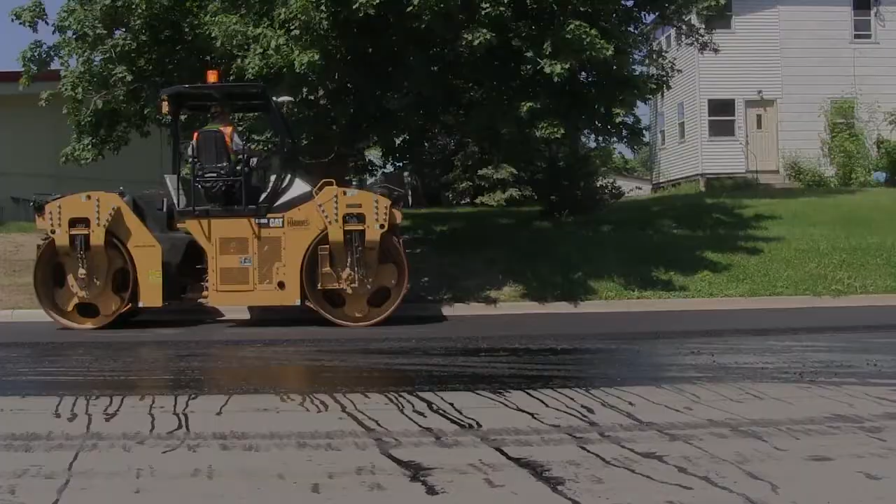One of the exciting systems we introduced within the last couple of years is our auto-adjustable compaction system. We call it AAC for short. This is an industry-first system that has intelligent compaction systems on each drum. So each drum is equipped with an ECM and an accelerometer.

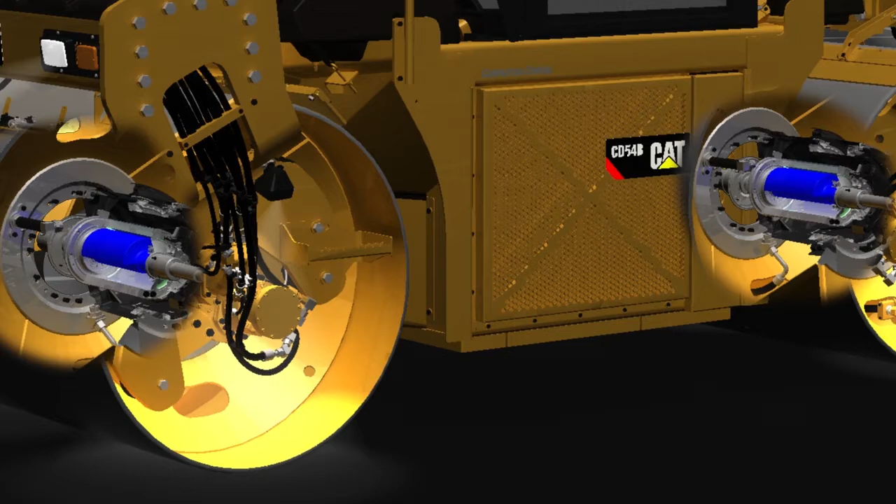The accelerometer, when the vibration is created, is actually measuring the feedback. With the measurement of the feedback, it makes adjustments in the amplitude. This is something that takes the setup of the machine away from the operator and automates the whole process. This will drive superior compaction and the quickest compaction.

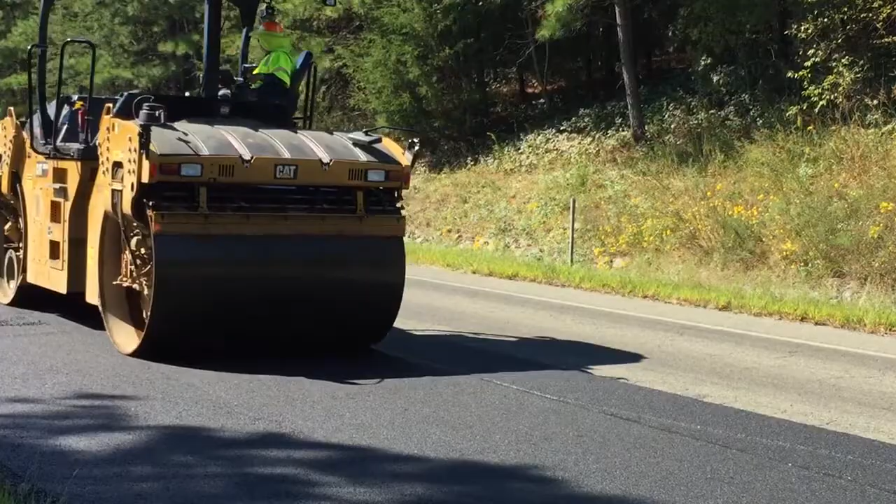One of the things that we're really excited about is our industry-leading reaction time. Some of the others that have systems like this only have it on one drum, but also the reaction time is significantly more. Ours reacts from minimum amplitude to full amplitude in as little as 4 seconds.

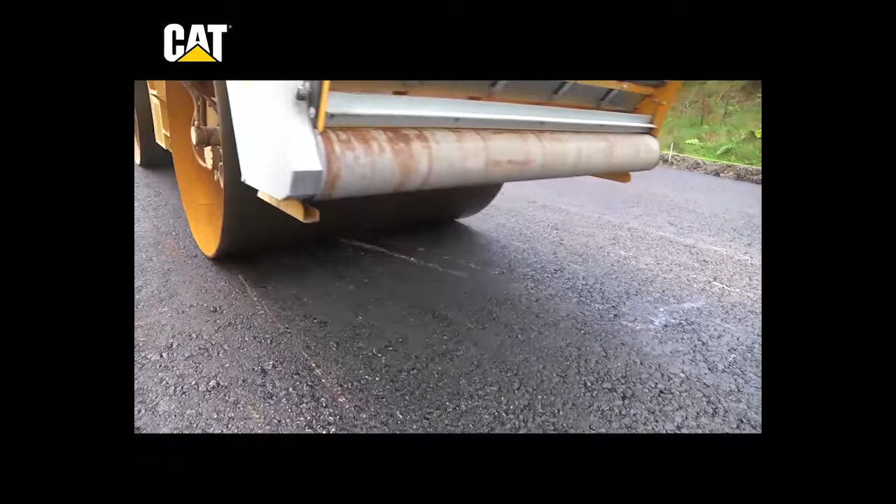So a quick video here. One of the things I'm going to point out right away is just a couple of things in our compaction control suite. Integrated temperature to pass mapping. This is an option conveniently located on the operator's left hand.

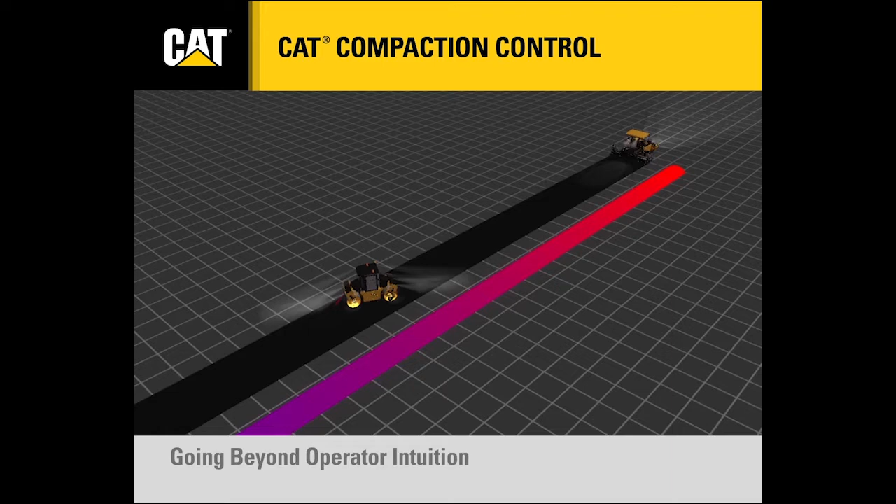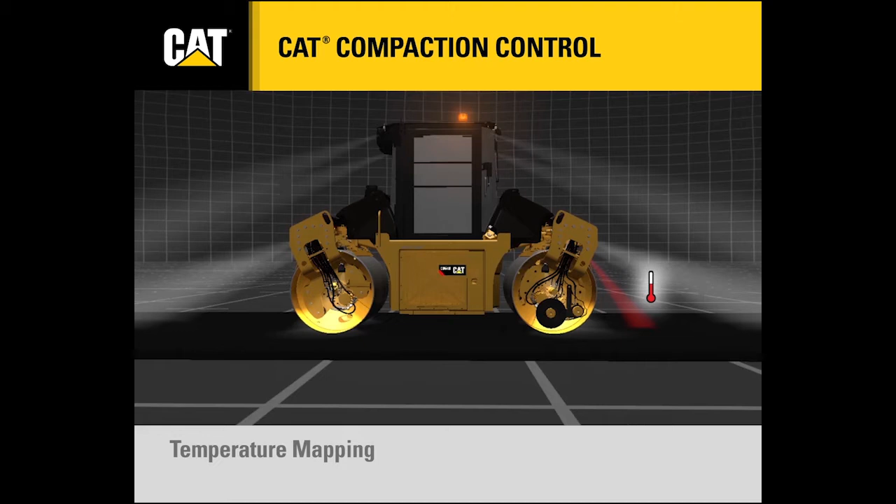So a quick animation showing the compaction process, rolling patterns. Starts with temperature. This is an option on our machine, so an infrared temp sensor in the front and rear of the machine. Now when we look at the auto-adjusting system, here's where you have the continuous processing of information, making calculations, all automatic on the machine.

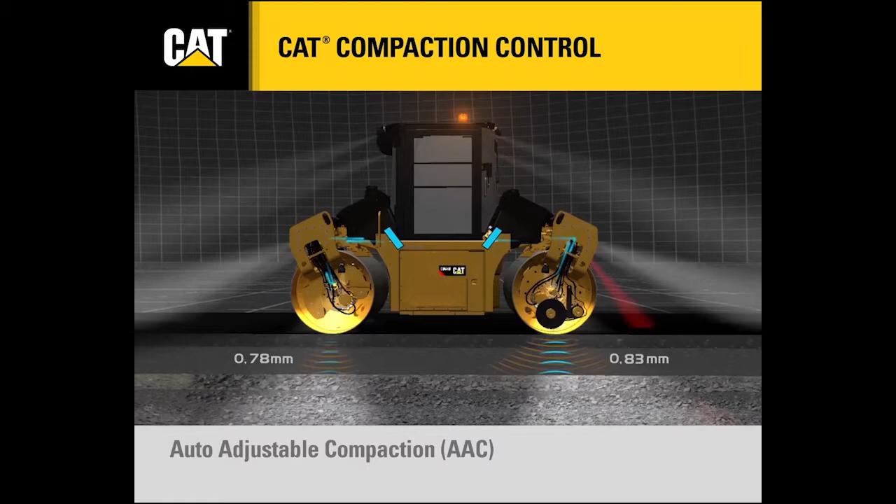The machine's automatically making calculations and it makes adjustments in the weights that actually change the amplitude. The amplitude is effectively the compaction energy that goes into the ground. Here you can see a couple of different values, so they're independently controlled.

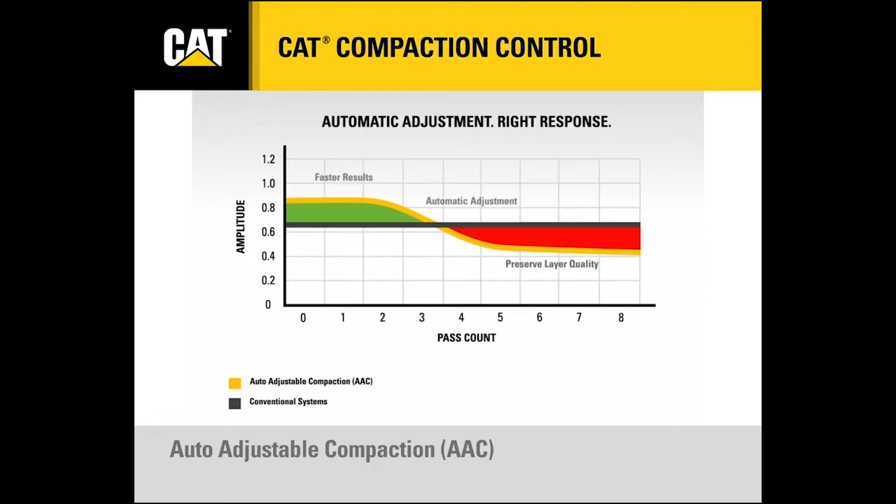Because this system has more amplitude than conventional systems, you can see that the compaction potential in initial passes is much greater. So you have faster results in the front side. Through the automatic adjustment, it eliminates the over-compaction, which preserves the quality of the compaction. So the durability of the asphalt layer is maintained.

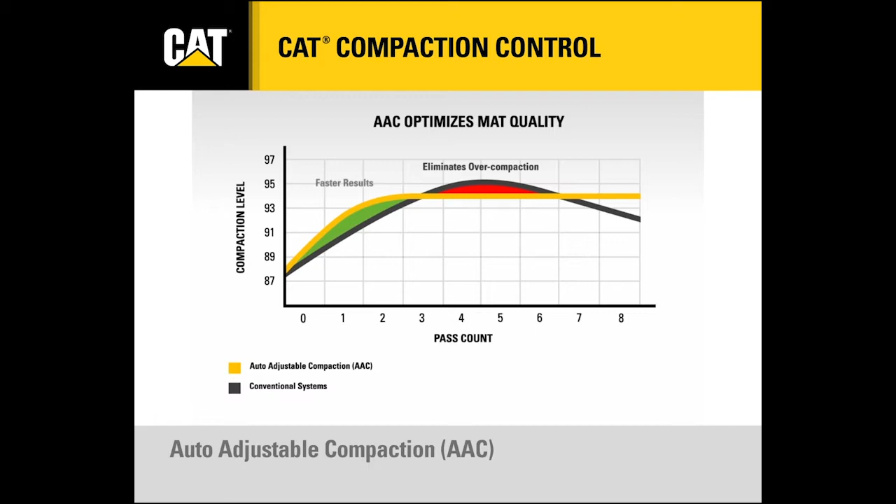When we look at this through a compaction curve, you can see the same information. Conventional systems with flat line settings will actually go through a process of over-compacting, which affects the durability, where this system automatically regulates through that process and preserves the asphalt layer.

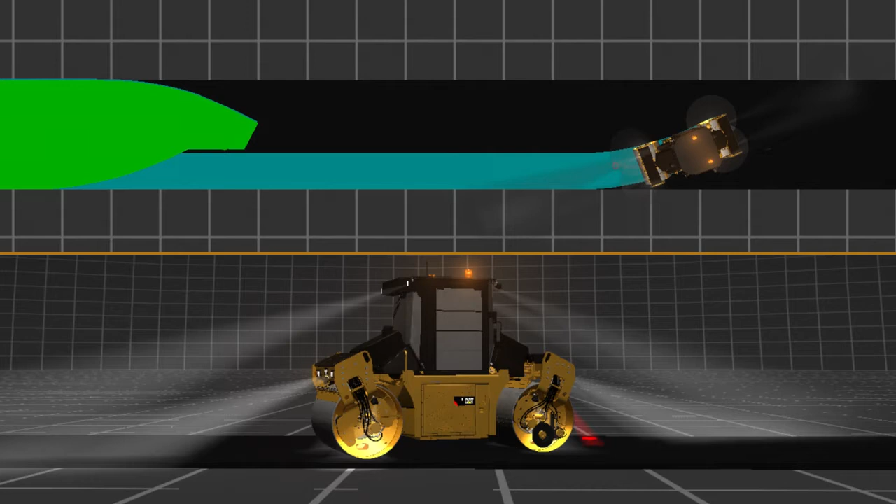Now a quick look at pass mapping. You know, one might think this is really a simple operation. This roller is making a rolling pattern. You can see here, because we created this animation, it's really evident that these kind of things can happen, but on a job site, oftentimes performed at night, how does an operator know when he makes the right number of passes? This kind of event is very typical on normal asphalt compaction.

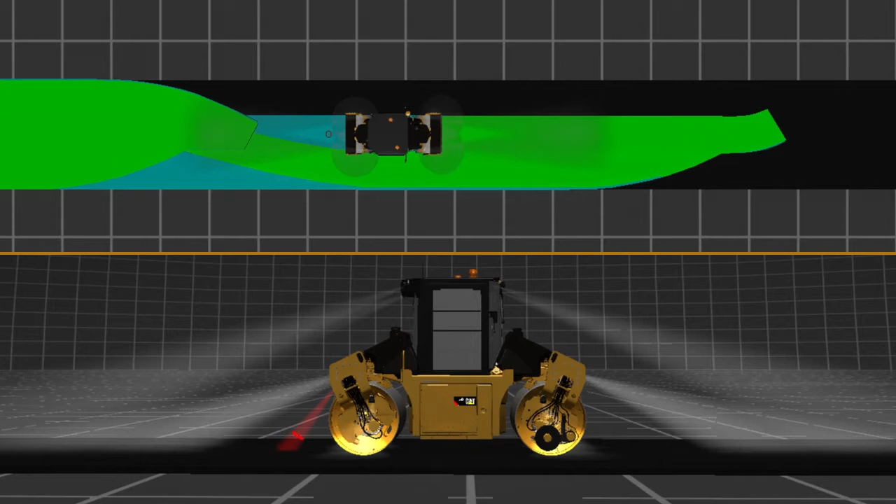A lot of agencies are recognizing this, and they're moving towards what the industry calls intelligent compaction specifications. And that's where temperature and pass mapping is required on many of the highway jobs these days. So a simple animation like this shows how easy missing a spot is.

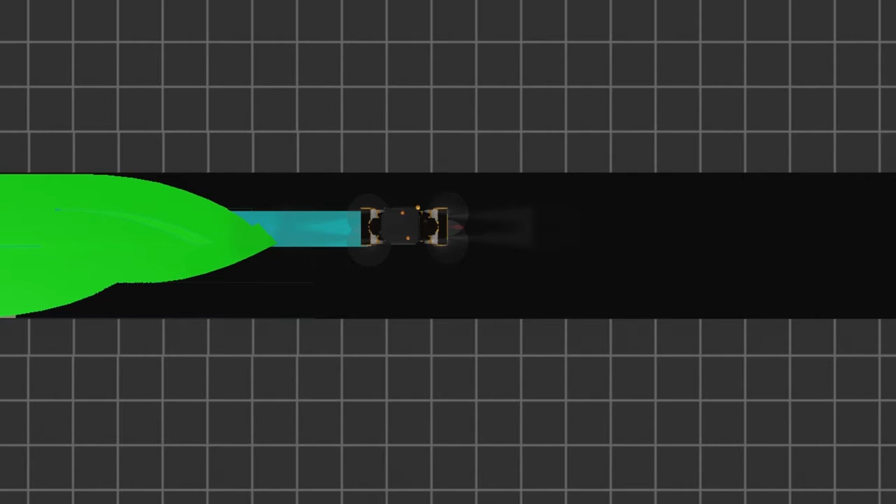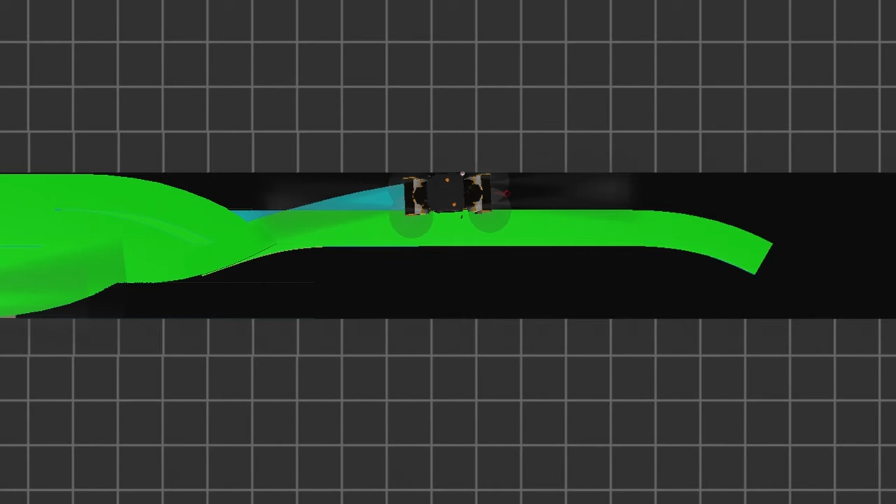Lastly, one of the new introductions for us is machine-to-machine communication. Machine-to-machine communication is very important, especially in the initial phases of the compaction, where oftentimes we have asphalt compactors that are performing the breakdown process in echelon. One compactor and the second compactor are working as one. When they're mapping, they must be sharing data to have the same compaction results.

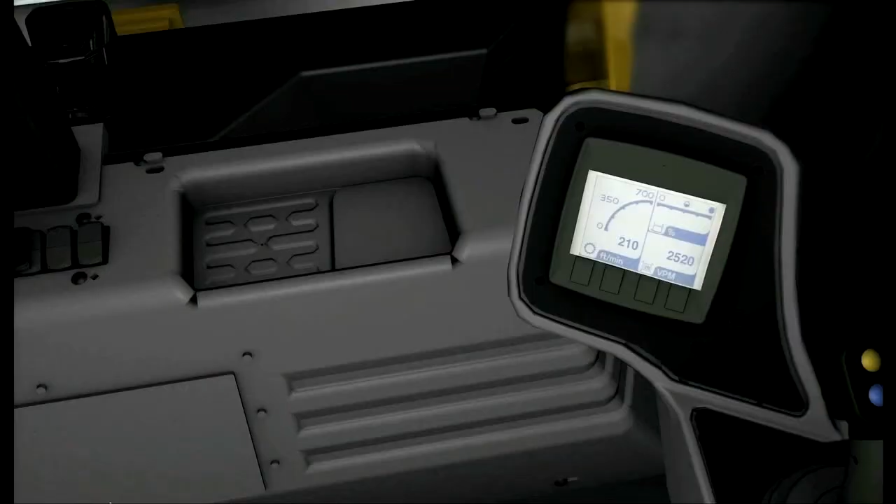It's a very simple system to run, very simple to set up. The nighttime operation would definitely be beneficial in my opinion. Obviously it's dark, sometimes you kind of lose where you've been. You can't really see your watermark during the night, so that way you kind of know you are getting your full coverage and you haven't missed a foot section somewhere.

My experience with it has been very helpful, so I do definitely believe it helps the efficiency and productivity. I've been very pleased with it.